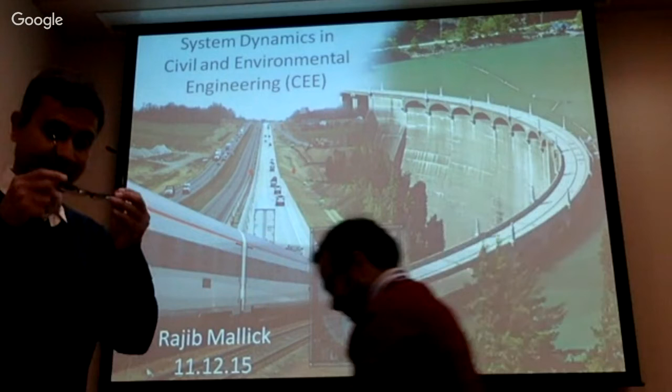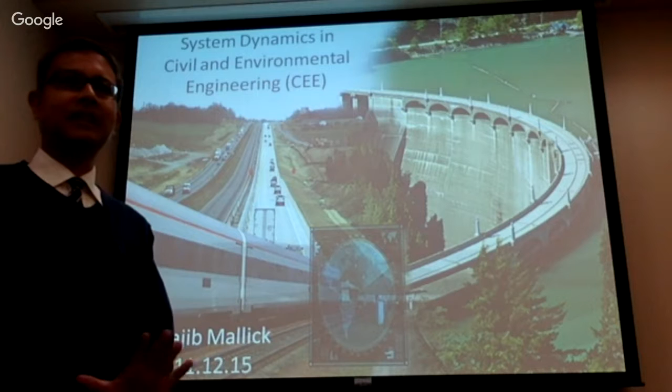I think I know you all, but this is the first time in my entire life I'm presenting something on system dynamics, so bear with me. And I am a student of system dynamics. I'm saying that for two reasons. One is I'm really a student, and number two, if I make any mistake, I can get by saying that I'm just a student.

Honestly, I started learning about system dynamics probably 3, 4, 5 years ago, and I'll show you some applications in civil engineering. I think in your field, they are pretty rudimentary, but still I would like to show them because we have to start somewhere. And I want to acknowledge Mike Radzicki.

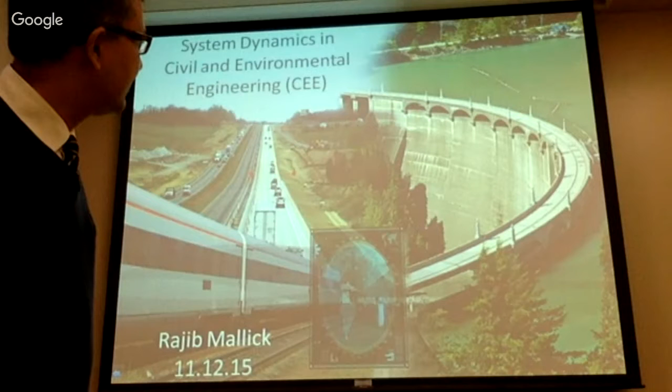You need the mouse. Yeah. This one is non-responsive, actually.

Let's see. So Mike Radzicki, Khalid Saeed, and the very friendly and helpful SD group here at WPI. Every day learning something, and also learning with Fred, who has joined the PhD program in civil engineering, and Uma and Ram, who are also doing their graduate work in civil engineering and trying to use system dynamics.

So what I'll do is talk about some background issues that probably require the use of system dynamics in civil engineering, and then talk about some problems. I told you I'm a student of system dynamics, and now I'm really a student because I am auditing Professor Khalid Saeed's course, so any mistake I make, do correct me. I hear often that system dynamics should probably be known as problem dynamics and not system dynamics. But we do have problems, and then I'll talk about more problems.

In civil engineering, we deal with infrastructure. If you have been reading the newspapers or listening to radio or watching TV, I'm sure you're aware of the many infrastructure problems we are facing in this country. I truly believe that system dynamics has come to the rescue and can be utilized for solving a lot of issues. I know there are other kinds of modeling as well, like agent-based modeling. But my learning in system dynamics has just started, and I do believe that pure system dynamics is really an amazing thing that can help us.

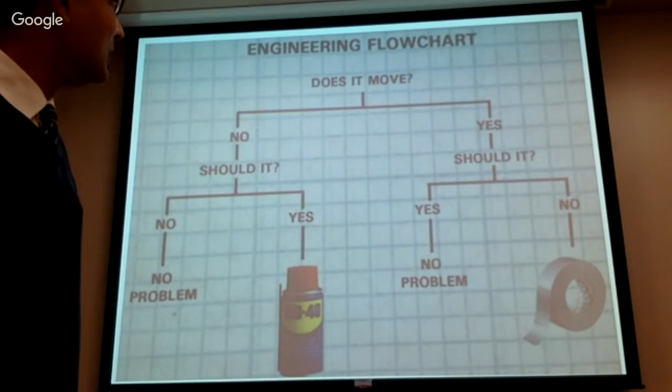You get up in the morning, you drink water coming through the water system, then you take your car and drive on the road, which is the transportation system, and come into buildings, which are part of building systems. It's a seamless thing, and we work on different areas. Today I'll concentrate on roads as one representative component of infrastructure. Roads are very important for the survival and development of any country. But there are issues that come along with roads.

So, for example, if you try to build a 6-lane highway through the Brazilian rainforest, the Amazon rainforest, you're killing the environment, you're killing the world, right? So I'll touch on those issues also.

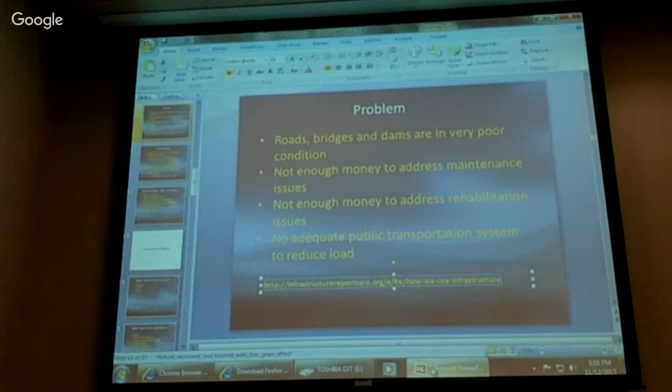No, there is no. At the top, there's an Internet Explorer. That's fine. My only concern is that I should be able to show the models. I think you need to download Firefox. Yeah, I think it will work. Sometimes you have issues. Just see what happens. You cannot install anything without having permission. Let's see. It says you can install. The fox should be able to sneak in. Excuse me. It's like everybody is not happy with that Explorer. Whenever you click, it says you should download the latest version. Let's see. Don't impose.

Okay. Now if I click on views. You have already copied that. Just paste the link. Just paste the link in Firefox. Yeah. Let me do one thing. Instead of doing it this way, let me sit down. I can show you, and then I'll get what I need to.

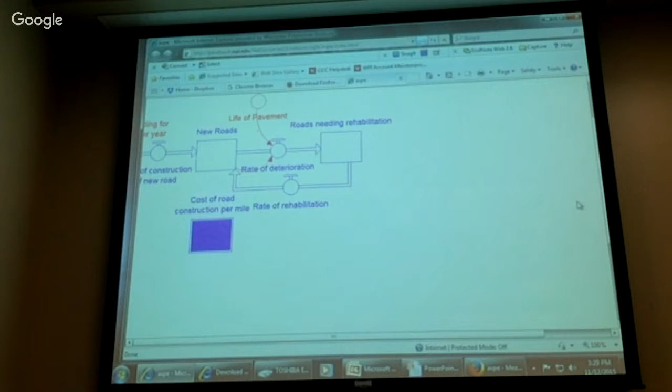So roads needing rehabilitation, there's a rate of rehabilitation. And there is a cost of construction per mile of road. There's available funding, there is a cost of road rehabilitation per mile. Available funding, there's a percentage of roads in good condition.

So that public safety and mobility indicator is a critical issue. So you saw the ASCE grade that was given to roads, right? So that's based on how safe and how mobile your inhabitants or citizens are. So that's a reflection of the overall quality of the infrastructure. So there's a rehabilitation budget shortfall.

There's vehicle mileage. So if you look at this, I cannot go this way, but the vehicle mileage has been going up, and going up exponentially. There's a negative effect from climate change.

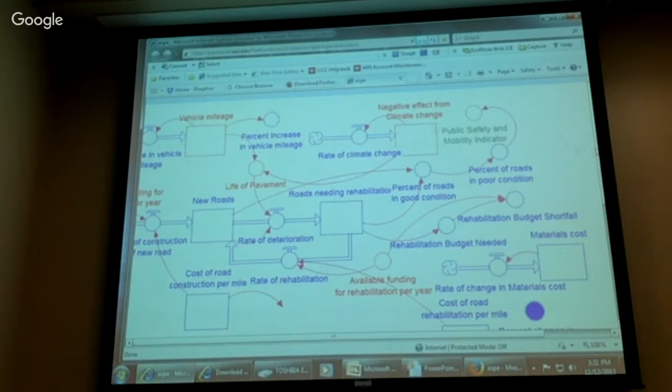Typically, the pavements that we drive on, the roads that we drive on, the bridges that we use are dependent on the maximum air temperature as well as rainfall. Okay, so I'll show you what those effects are. And materials cost has been going up, right? Percentage change.

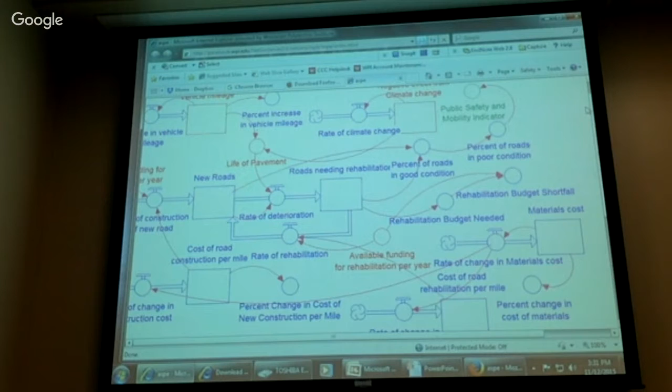All the models I have the diagrams. So you're using NetSim? I'm using NetSim, right. Actually, you're more advanced than I am in technology because I've not used it. Just to make sure that I can use it independent of the scale. Yeah.

So what has happened is, over the years, and this kind of relates to universities also, the investment in research and also in faculty hiring, for example, investment for retaining faculty members or giving them research funding from NSF or the DOT, has gone down significantly as the needs of other things have increased. So, for example, now you have more funding going to things like cybersecurity. You have things going on with robotics, but not so much for civil infrastructure.

Okay, and the way this has been framed, the issue is that when you have a number of faculty, that kind of indirectly dictates the number of graduates in road engineering or pavement engineering. That dictates the number of researchers in pavement engineering, and everything is dictated by the research funding per year. Because if you don't have research funding in engineering, you're doomed. You will not get any new faculty member. That's a reality. However people put it, that teaching is of primary importance, if you don't have research funding, you cannot get faculty members.

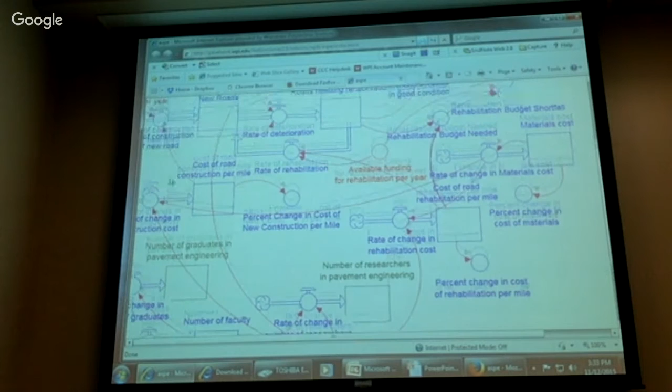And it has been shown earlier that the research funding per year dictates all these things, and that actually dictates the change in the construction cost. When you develop new materials and new technologies, you bring down the cost of construction, as well as prolong the life of the infrastructure component. So you have more durable materials. And if you continue to do this, you will see that these things are tied to the rate of change in rehabilitation cost and the budget needs. And finally, it dictates what kind of public safety and mobility indicator you get.

So instead of getting lost here, I now don't have the little black arrow to go to. So let me start it from the beginning in order to show you the results, if you try to simulate it. Hopefully this will work.

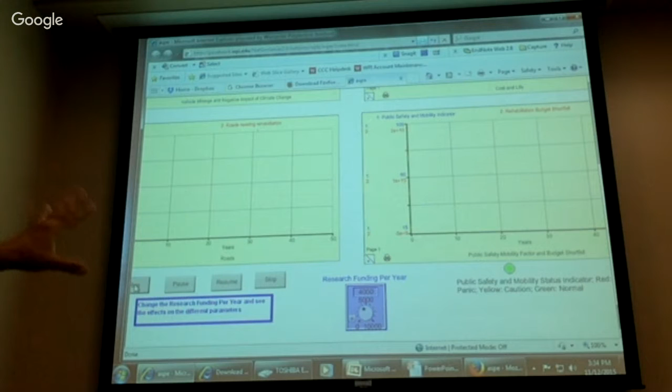So this is like a dashboard, and if you have a research funding of say so, and I can go to any level of research funding, and if I run it, look at this plot which shows the public safety and mobility indicator over time, and look at the rehabilitation budget shortfall. Your public safety and mobility indicator drops significantly, and your shortfall increases, and that's the story that we have seen. That's reality. From the 50s to 2011, 12, 13, 14, the condition of roads has steadily gone down, and the budget shortfall has increased. The question is how do we fix it?

This is not a complete model, and as I said, there are many things that can be done to improve it. But trying to frame it this way, whether it's responsive to critical things. So if you see here, there is a yellow, which is a caution. And if I bring it down to a very low level and run it, you'll see that this is at some point going down further. And if I make it 0, which means I didn't add any research funding, it has remained the same over the years, and you can see that it starts to go red.

And of course, you can change it and run it with different numbers, and you'll see that you don't have that much shortfall. You can keep on increasing that. In this case, it falls down to a value of 67, whereas at 0 or this level, it fell down to about 45. You can keep on playing with these things to develop the equations. But the sad thing is that we don't have this model, this picture in the mind, when we deal with infrastructure issues. Any question regarding this model?

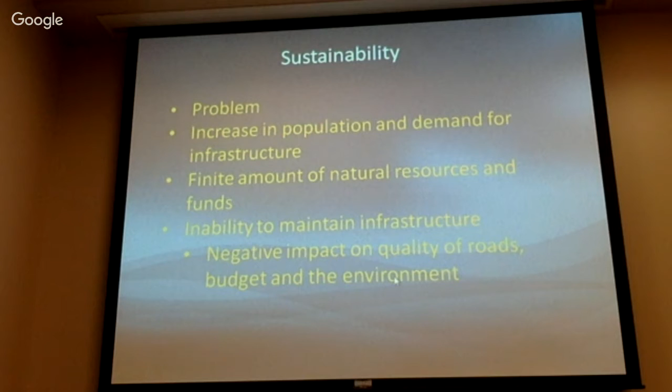Let me move on, in the interest of time, to sustainability, and that's what I referred to earlier: we need roads for development. But look at this simple fact: 15,000 tons of aggregates are required per kilometer of highway. It's a finite resource. You could say there are lots of mountains and hills, but at some point you do run out of them, and there are many cases where this has happened.

For example, in California, to make it profitable, you actually get aggregates from Mexico by barge. There are countries in Europe which get aggregates from other countries as well, for example Latvia and former socialist countries, and in India, in many cases you don't get aggregates within 200, 300 kilometers of your project. Here in the States, Florida has very bad quality aggregates, lime rock, for example. So they always get their aggregates from Georgia, granite.

And then in the Midwest, there are regions where you don't get good quality aggregates. So the procedure always has been you load up a truck with corn, you go to another state which needs corn but has good quality aggregate, you give them corn and get aggregates in return. Backloading. Yeah, but that's also drying out. So it is a terrible issue.

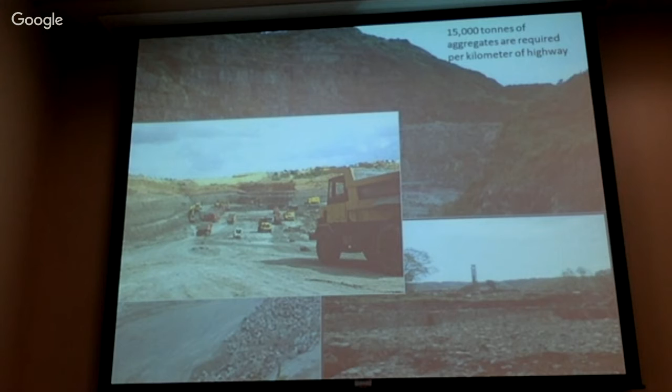And in this case, there is another model which I don't know whether I will be able to show you. Hopefully they will come up. 1 second.

So there are issues. For example, if you build more roads, you're actually cutting down the forests. And if you cut down the forests, obviously you are cutting down the trees, which means you are reducing the absorptive capacity of CO2, and then you're actually burning more CO2 because you are traveling and you're also constructing roads. So the net effect you can imagine is a reduction in the quality of your environment. Okay. So if interested, I can leave this here. You can go to this website and take a look at the different results and things like that.

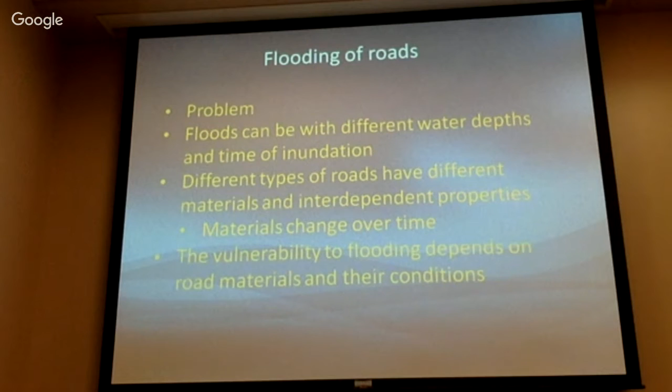The other thing that's pretty important is the flooding of roads, and I'll show you a quick example here. So if you take a cross section through a road, when you're driving on a road, this is what it looks like. In general, there could be variations, right? So there's a surface course, there's a base course, there's a sub-base course, and there's a subgrade. So subgrade is your existing soil. And we put these layers on top of each other to make sure that when you put a load on the surface, the subgrade soil does not deform, because by the time the load reaches the subgrade soil, it has been distributed to a larger area, so the stress in that layer is very small.

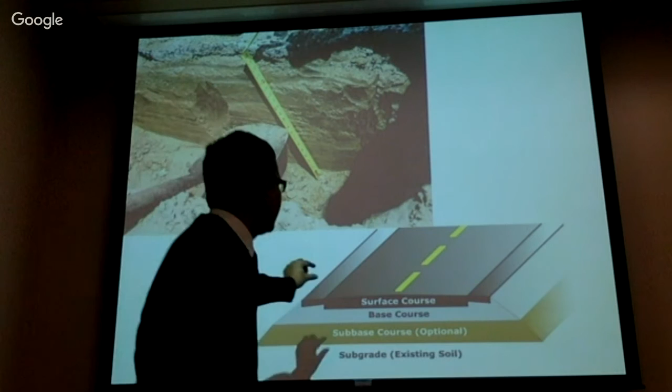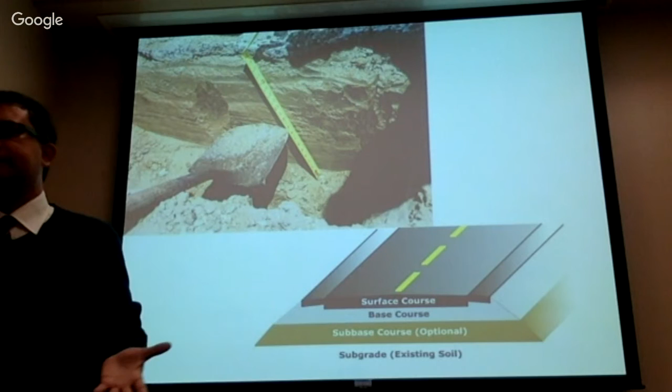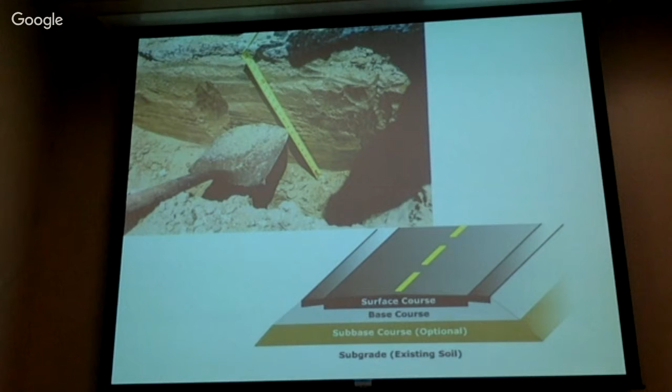Okay. When you have flooding, what happens is, if you have a very thin surface layer, the water goes in very quickly and destroys the base course. And if the base course is destroyed, you have nothing to support the surface course, so the whole thing falls apart. Okay. And if you look at the structure of a road, this is the most costly component, because this has asphalt, which is like $500, $600 per ton. And the aggregates, which make up the lower layers primarily, are like $35, $50, $60 per ton, if you don't factor in the delivery, the transportation cost also. Okay, so that's a critical issue.

And what we have been doing is using system dynamics, trying to figure out what's the critical time period to cause the saturation of granular layer, and that's the critical time period for failure of a pavement. So Fred, we're talking about critical time period. So Fred is working on a very interesting project for resiliency of Logan Airport. In fact, Massport, they have different assets, and he is using system dynamics. And we are talking about critical time failure of runways, for example, or electrical systems. So this is on a small scale, something like that: if you have a road, you know the road condition, you know the materials, the age and everything, and you know the depth of flooding and how long the flooding has been there. What is the time it takes for the road to fail?

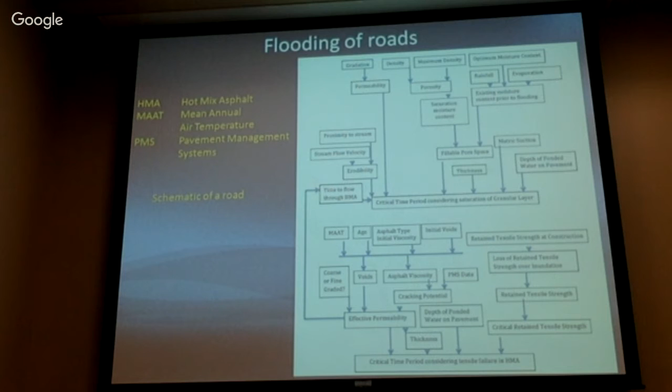And again, there is a model which shows this is what flooding can do. This is a road in Maine, northern Maine. Just cut away the road in half, and you can see here what's happening.

Steve, are you using these models for teaching? Primarily teaching, and in some cases research. But after the research, do you use it in class? See, the problem is I don't have any class or any module or any place where I can actually use these things. So Mike and I actually had a proposal to this education grant. So maybe coming up with some modules of civil engineering in system dynamics, or some system dynamics modules in civil engineering. So hopefully that will happen in future. Cool. But it's needed. It's needed.

So anyway, you can see how it is coming in the picture. So a road is a living thing. It changes its properties every time you have traffic going on, if you have a rain event, or cycles through the air temperature. So I think I'm running out of time, but I have one more. This is the last one.

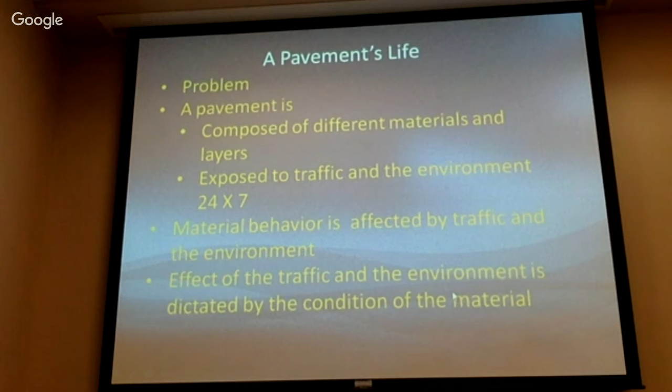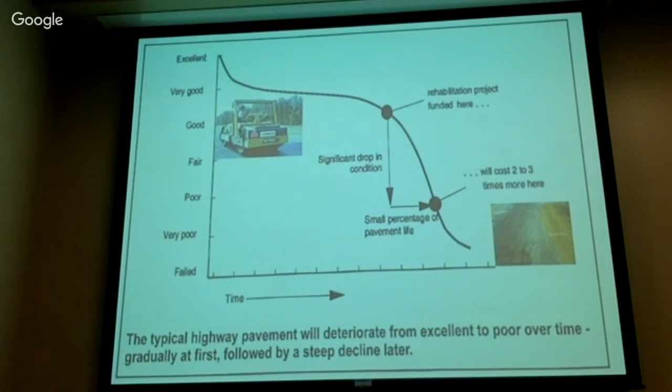Many people live by the side of highways, and you have to put up big walls because you hate the noise. But if you have an open graded friction course like that, and there are many different kinds of pavements, but they are costly, they cost more than normal pavements, you can actually reduce the noise by over 50, 60%. So because they have large pores or air pockets, the tire actually forces the air through them rather than outside them. So you don't hear the noise if you're standing by the side of the road.

So that's another example of the use of system dynamics, because it's changing and there's a feedback loop. The condition of the road at any time dictates the response of the road to the traffic and the environment, and vice versa. Okay, so that's it, I think.

So what I conclude is that SD can help us understand the importance of a problem, particularly over the long term. The main causes, the solutions, the better solutions and the best solutions we can probably filter out, and then it provides the answers that you've been looking for. But SD is not only applicable for CE, I think it's necessary. Otherwise, there are many questions that cannot be simply answered.